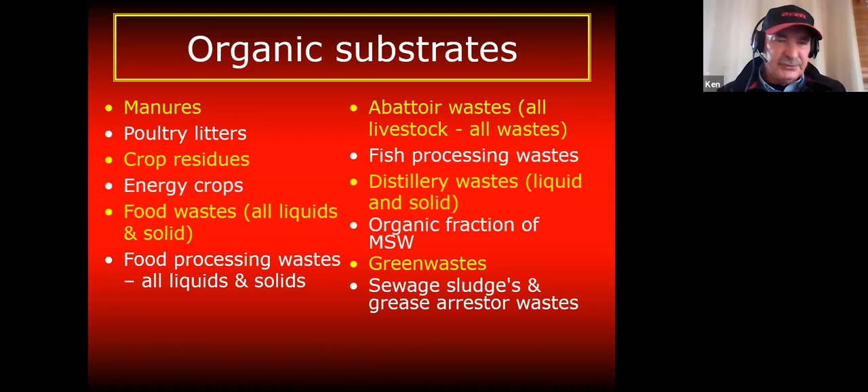Let's have a look at a biogas plant as the point of convergence between photosynthesis and anaerobic digestion. Substrates is the term we use to describe the organic material being fed into a biogas plant. And this is just a very small selection of those substrates. The common origin of all those substrates is photosynthesis. They all came into existence at some point through photosynthesis.

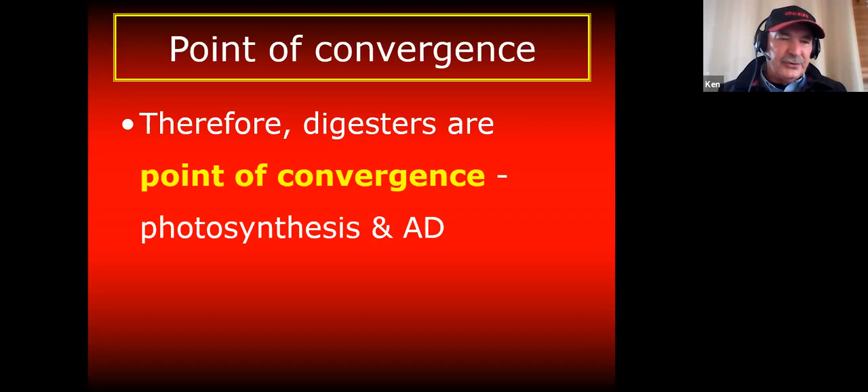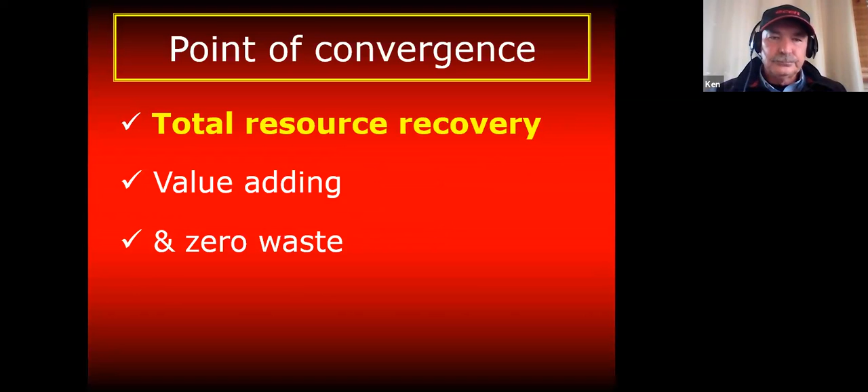The material transformation that ensues from this point of convergence delivers total resource recovery, value adding, and zero waste. All we humans do is wrap layers of technology and systems around this point of convergence to leverage off what billions of years of evolution naturally delivers.

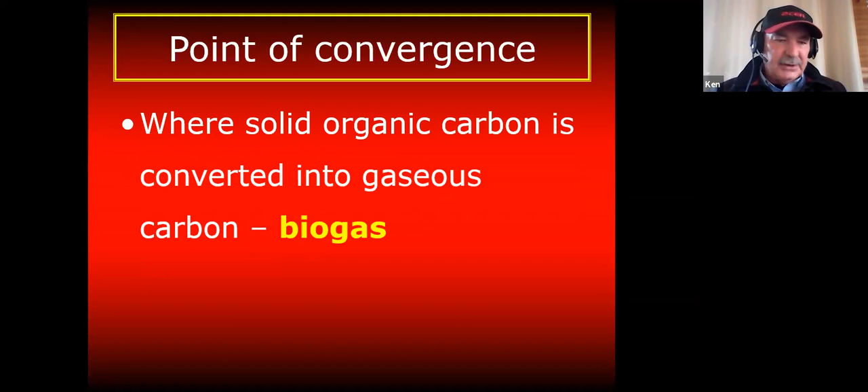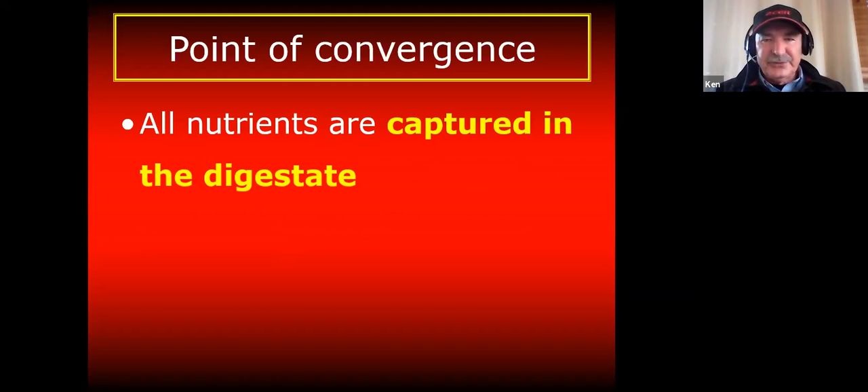Whatever elements of the substrates that are not converted into biogas are captured in the digestate. All the nutrients from the substrates are captured in the digestate, and these nutrients come pre-packaged within a synthesis of residual carbon and a huge soil-building microbiological resource. The digestate is fully recyclable back into agriculture.

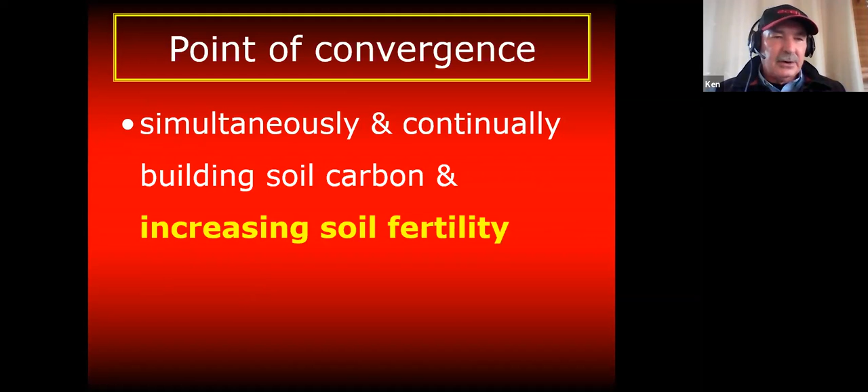If the full potentials of AD and biogas are captured within an optimized circular economy system, the strategic use of the digestate enables more food and more energy to be sustainably produced from the same area of land. And this is done whilst simultaneously and continually building soil carbon and increasing soil fertility. The biogas itself is just converted solar energy.

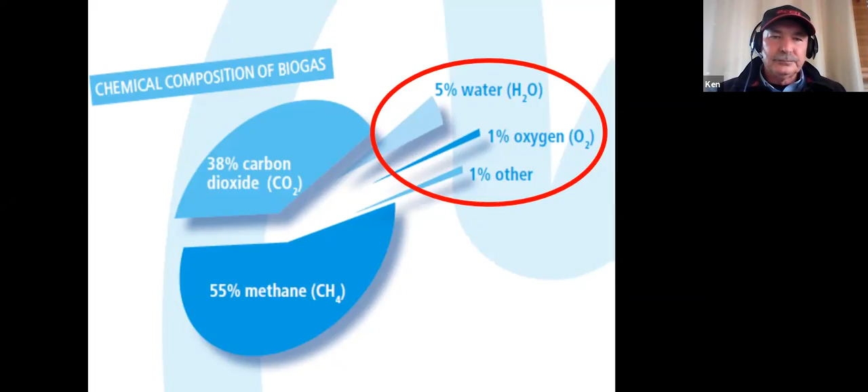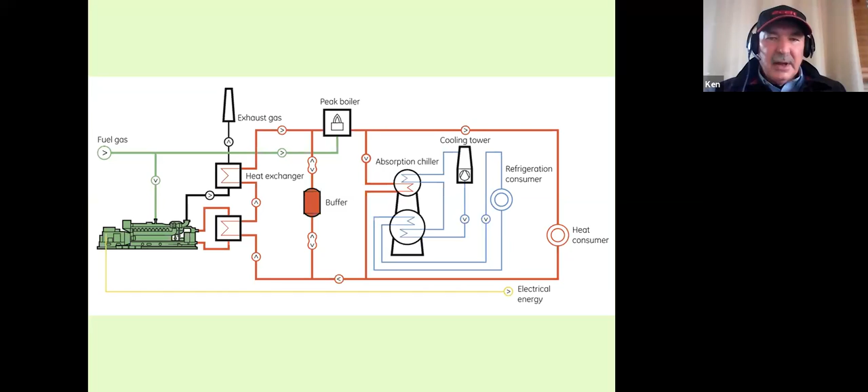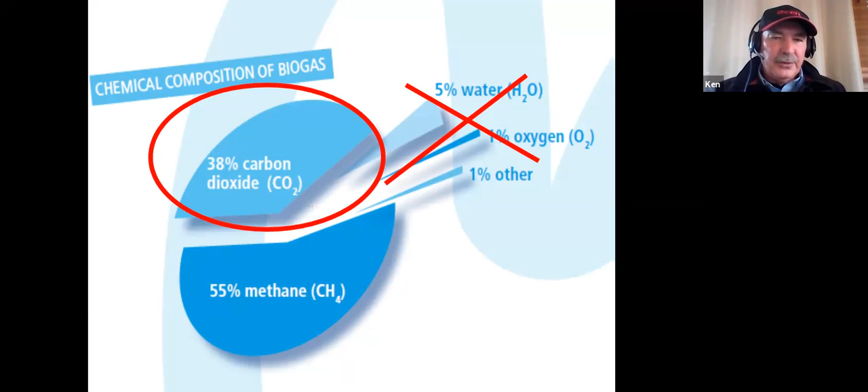Now let's have a look at biomethane. Biomethane is conditioned biogas with the CO2 removed. Both the renewable methane and the green carbon dioxide can be captured as separate gas streams because both have infinite roles to play within a circular economy system. Biomethane, also known as renewable natural gas or RNG, is completely compatible and fully interchangeable with natural gas.

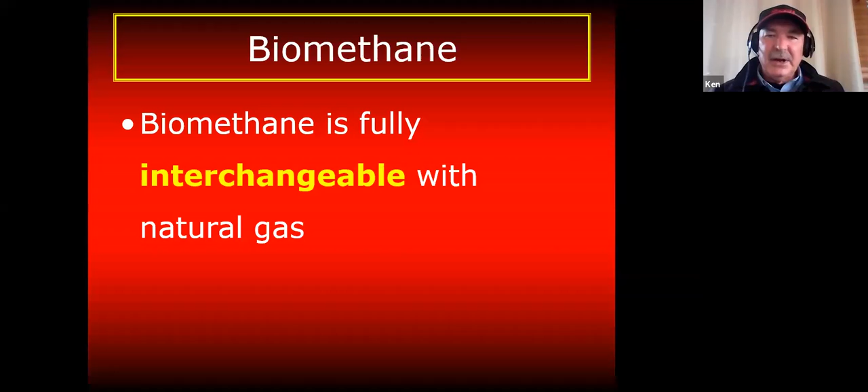In Europe, the focus of AD and biogas is shifting more towards biomethane. In Europe, biomethane production increased over 2,000% in the 5 years to 2016. In the next 6 slides, we'll look at some major biomethane initiatives. Italy has set a target to inject 288 petajoules of biomethane into its gas grids by 2030. This biomethane will be produced from both agricultural and urban source substrates.

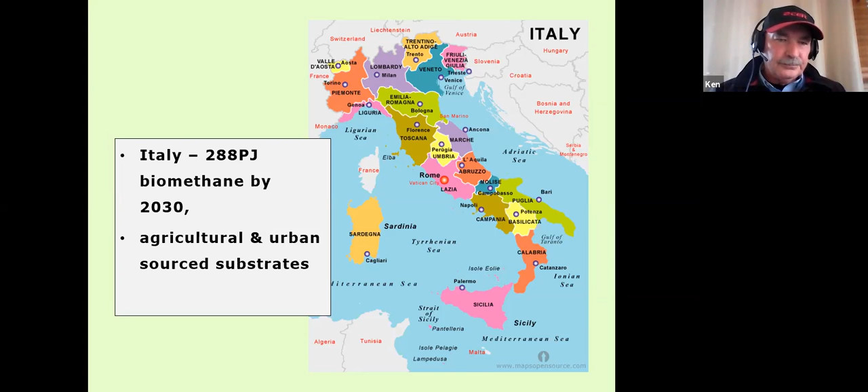Denmark has plans to meet 100% of its methane demands from biomethane by 2035. Denmark will have no inter-country gas transmission connections. Denmark will also soon have the first 1 million tonne per year biogas plant. That is 1 million tonnes a year of substrates being fed into a single biogas plant.

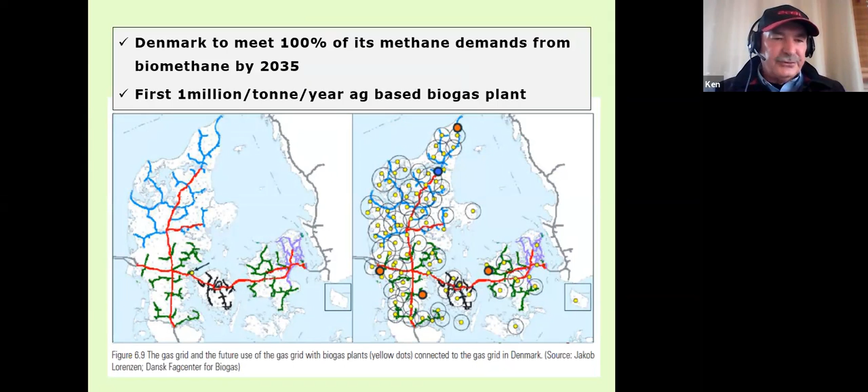A consortium of 7 European gas transport companies, plus the European Biogas Association and the Italian Biogas Association, commissioned a report called Gas for Climate. The report identified 122 billion cubic metres of renewable gas could be developed by 2050, with half of that being biomethane from anaerobic digestion. That is 2,268 petajoules per year of biomethane by 2050.

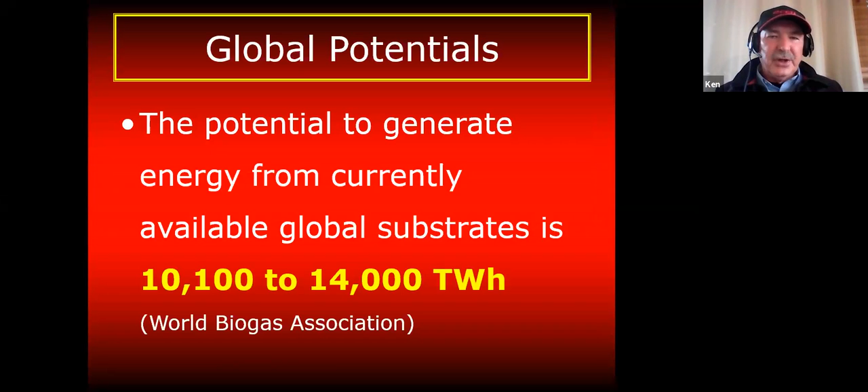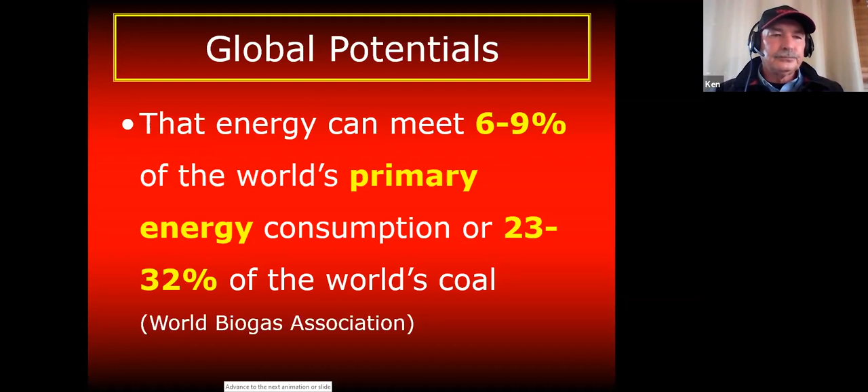Let's have a look at the global potentials of AD and biogas. The following information comes from a recent global study undertaken by the World Biogas Association. The potential to generate energy from currently available global substrates is 10,100 to 14,000 terawatt hours. This amount of energy can support 6 to 9% of the world's primary energy consumption, or 23 to 32% of the world's coal-based energy. AD and biogas have the potential to reduce global greenhouse gas emissions by between 10 to 13%. When AD and biogas are used strategically to enable circular economy systems to exist, the global deliverables increase exponentially.

Let's have a look at some examples of circular economy systems that are enabled by AD and biogas. This is a vertically integrated broiler cluster enabled by AD and biogas. The system simultaneously produces energy, food, feed and organic fertilizer as system co-products. The efficiency of this system is orders of magnitude greater than any existing broiler cluster. This system produces 4 to 6 times more energy than it consumes, and this includes transport energy. These same principles can be applied to many livestock-based systems. The perennially struggling Australian dairy industry could be reinvented through the widespread adoption of AD and biogas-enabled circular economy principles.

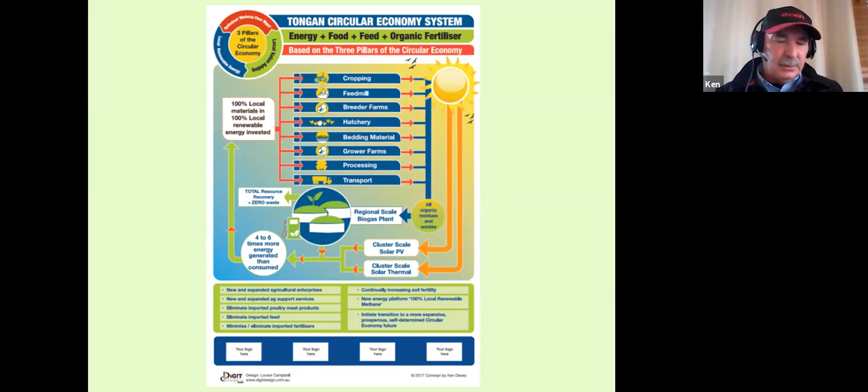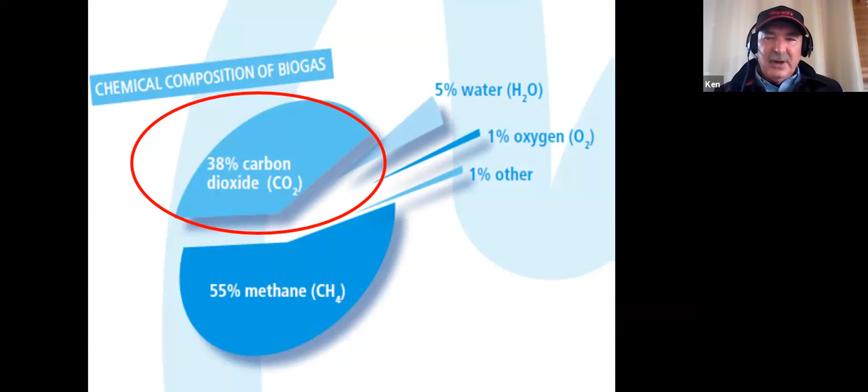Remember, when we upgrade biogas to biomethane, we can capture the green carbon dioxide. And both the green carbon dioxide and the methane have infinite roles to play in circular economy systems.

The other main input into this system is liquid nutrient. This liquid nutrient can come from the liquid fraction of the digestate. The energy to dry and process the seaweed into a wide range of high-value products can come from a biogas-fueled CHP. The synergies between AD, biogas and the seaweed system are simply compelling.

We are hoping to develop such a system in the Newcastle Hunter area of New South Wales. This system will be based predominantly on urban source substrates. If this project proceeds, it's likely to be the first biogas plant in Australia that injects biomethane into the gas grid.

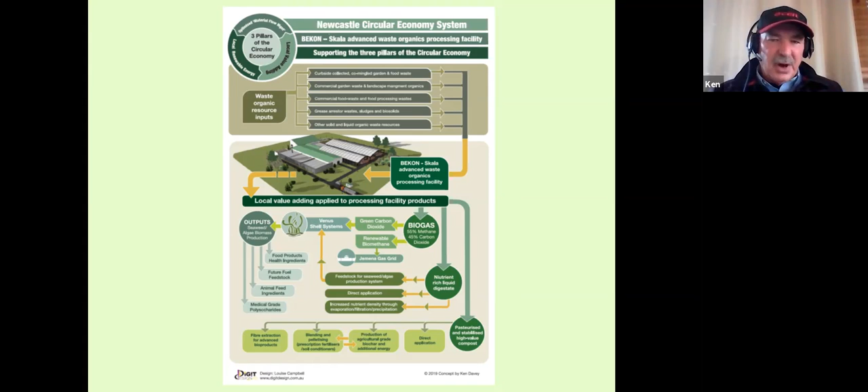Drought is a big issue in Australia right now and will become a bigger issue into the future. So let's see how AD and biogas can build drought resilience into agriculture and regional communities at an industrial scale. The majority of the 18,000 commercial biogas plants in Europe are agriculturally aligned. In Europe, biogas is largely an agricultural-based energy and total resource recovery platform.

The production of food, feed, fibre and energy are entrenched elements of European agriculture. AD is a continual process where products are produced 24/7, 365 days a year. This provides the farmers and the regional communities connected to biogas plants with a continuous source of income. Let's see how this continuous source of income can be applied to alleviate the financial stress of drought.

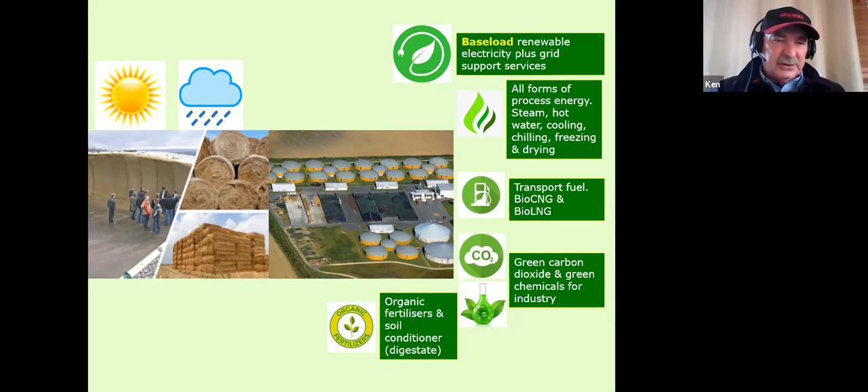Transport fuel in the form of bio-CNG and bio-LNG, green carbon dioxide and green chemicals for industry, and organic fertilisers and soil conditioners via the digestate. So they're the base products that can come out of our industrial scale biogas plant. Now let's have a look at the commercial drivers.

This barrel of unrefined crude oil equals 159 litres and carries approximately 1,700 kilowatt hours of energy. At US $60 a barrel, this crude oil feedstock is feeding into its refinery at US 3.529 cents a kilowatt hour.

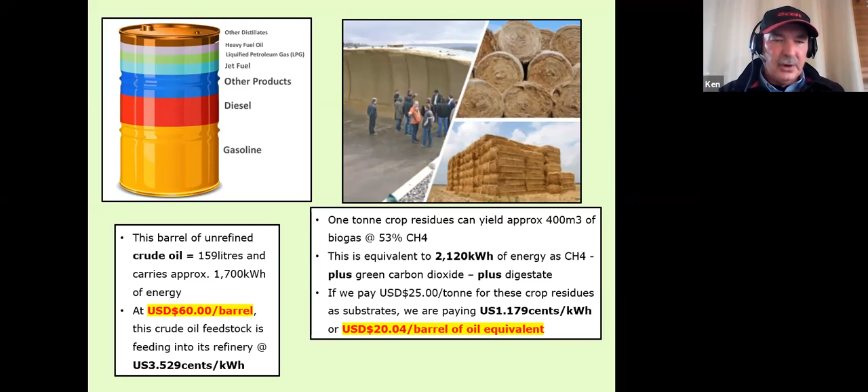One tonne of crop residues can yield approximately 400 cubic metres of biogas with 53% CH4, 53% methane. This is equivalent to 2,120 kilowatt hours of energy as methane. On top of that, we have our green carbon dioxide and our digestate. If we pay US $25 a tonne for these crop residues as substrates, we are paying US 1.179 cents a kilowatt hour, or US $20 per barrel of oil equivalent.

On the left, we have crude oil feeding into an offshore oil refinery that we have no control over for US $60 a barrel. On the right, we have local biomass feeding into a fully sustainable, 100% local industrial scale biorefinery that we have total control over for US $20 per barrel of oil equivalent.

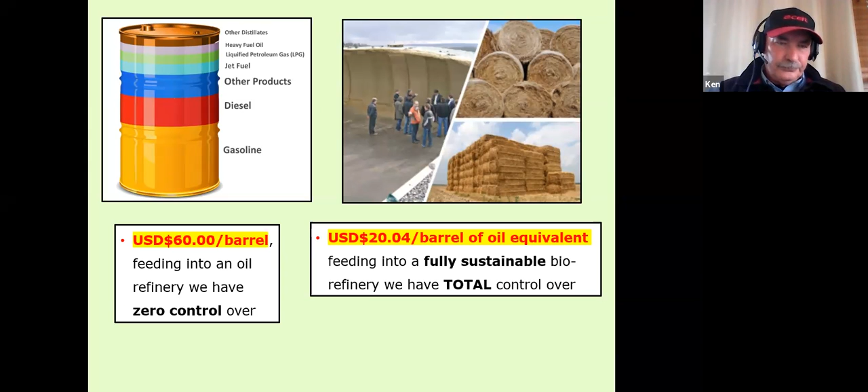This is a graph of crude oil prices over the last 40 years. The two straight lines down the bottom are set at $20 and $15. And as you can see, there has been very little time over the last 40 years where crude oil prices have been below those lines.

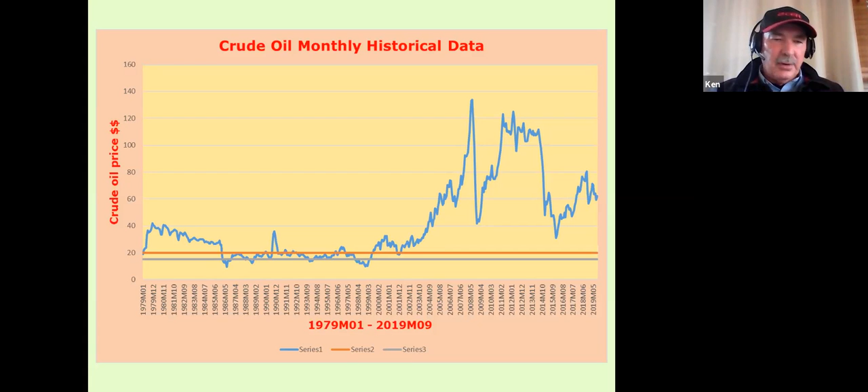Importantly, because our industrial scale biogas plant exists, every kilogram of waste and opportunity-based substrate from within the region will be directed to the biogas plant for co-digestion. An example of an opportunity-based substrate is a commercial crop that has been storm damaged and is no longer fit for purpose. Another example is that in good years, it's not just crops that grow well. There's also huge quantities of landscape-based biomass.

Because the biogas plant exists, it's now economically viable to harvest this landscape-based biomass and direct it to the biogas plant. It's important to remember that via the digestate, we will be transferring all of the nutrients and some of the organic carbon from this landscape management biomass into our agricultural soils. When the region starts to apply the deliverables of this biorefinery to value add to the local agricultural production, more waste streams will become available.

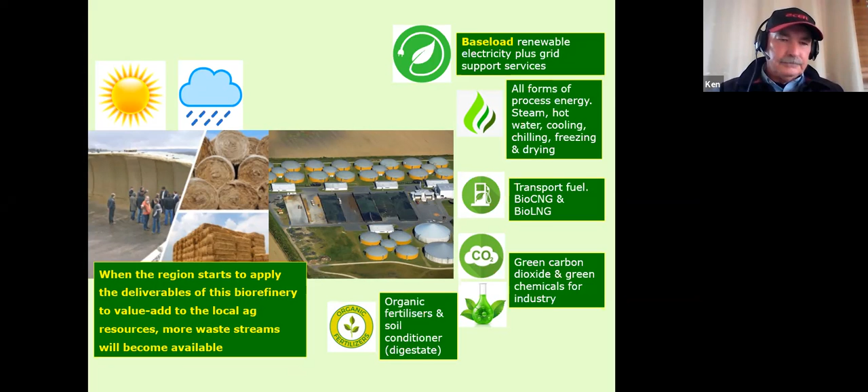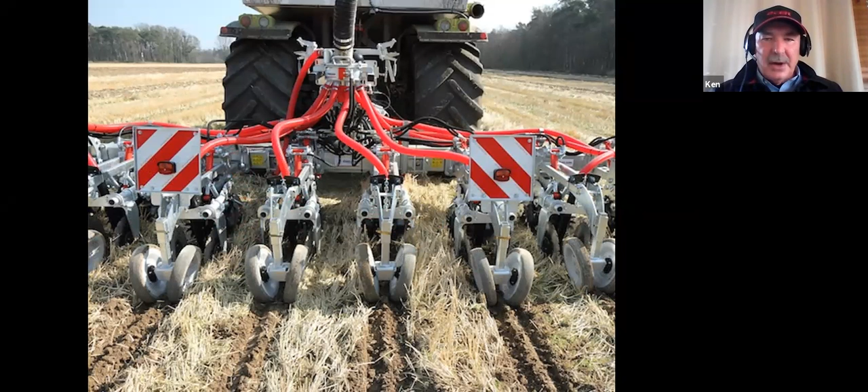This strip till system is the best of the digestate injection systems, and it opens a small trench, injects the digestate into the root zone of the soil, then forms, closes, compacts a protective soil mound over the injected area. The incorporation of other nutrients, along with agricultural grade biochar, within the injected digestate is fully achievable and desirable. When compared to leaving the unharvested residues in the paddock, this system delivers substantially superior outcomes.

So, is AD and biogas worth the effort? Let's have a look at the German biogas sector for some guidance. The development of the German biogas sector began in earnest in the year 2000 via the legislated Renewable Energy Sources Act. The Renewable Energy Sources Act is, in my view, the most inspired piece of public policy in generations. What that piece of inspired public policy has unleashed is simply unimaginable. A complete socio-economic transformation.

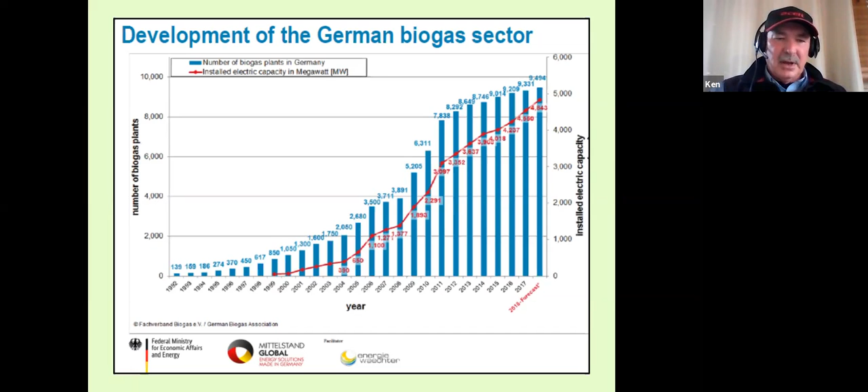So this 9.3 billion and 47,000 jobs, in fact, is only a part of what AD and biogas delivers to the German economy. And remembering that most of this occurs in rural and regional Germany because this is predominantly a rural and regional energy platform, or energy and total resource recovery platform.

So how would that play out in Australia? New South Wales on its own could have a biogas sector half the size of the German biogas sector because it's not to do with the size of the population, it's to do with the amount of biomass that you can grow and the size of your agricultural areas.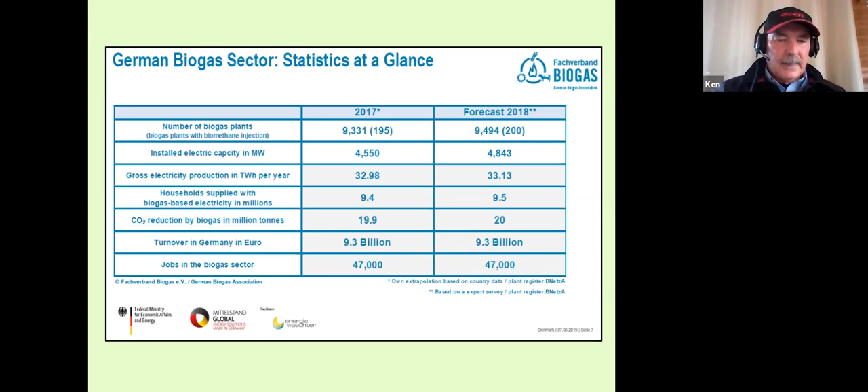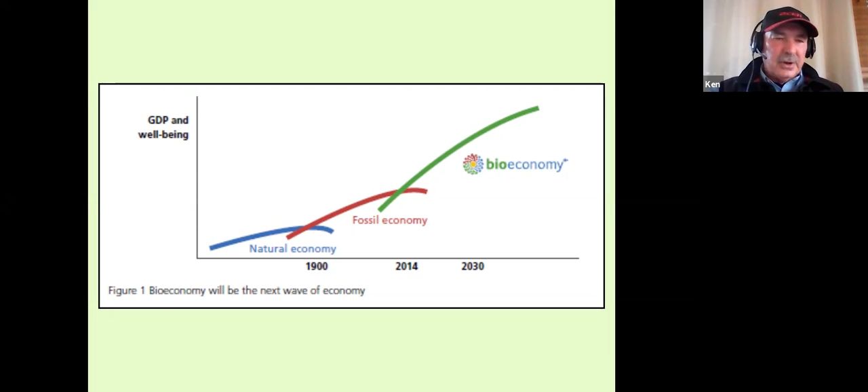As captured by the trajectory of the green line, transitioning Finland onto a bio-based circular economy development platform will enable a level of socio-economic prosperity that has never been experienced before in the history of Finland. And thank you.

Thank you very much, Ken. It's a brilliant presentation. A lot of technical stuff there, but it's all put together. It's a fantastic story. Now, I'll bet there's a few questions out there. Who has a question? Would you like to turn your slides off, please, Ken, and we can see each other?

Okay, yep. Where do we go for that? In slideshow. Okay, have I done it there or not? That's good. Yes, thank you. Wrong button. Okay. Yes, Peter Todd.

Obviously, the German focuses on kind of rural products. Are forestry products also relevant for biodigesters? No, not really. The best material for digestion is stuff that you would characterize as soft green material. If it has a high lignin content, then generally it's not good for digestion. There are some exceptions to that rule, but generally speaking, if you put a kilogram of lignin into the front end of the biogas plant, you'll get a kilo of lignin out the back end. So it's material that can be described as soft green material.